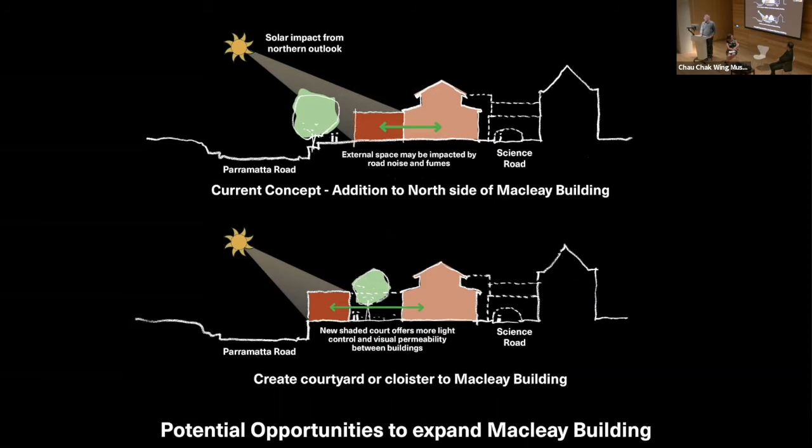So, really inspired. The other perhaps surprising thing for some people - and I hope I don't upset Scott too much with this interlude - but we were actually invited to build a building on a different site: the Macleay Museum, one of the first purpose-built museum buildings in Australia. We made some suggestions in our submission about how you might start to explore expanding a very sensitive heritage building on a very, very constrained site.

And it was a wonderful building. It doesn't exist currently like this - it's been progressively filled in, but it had the character of an amazing space, an amazing place, which could still work very well as a contemporary museum. It's surrounded by some really interesting external spaces that exist along Science Road, creating a series of outdoor rooms which we thought we could evolve.

But it has a very aggressive side on the northern edge, Parramatta Road, with thousands of cars passing there every day. So while the landscape is really interesting, the site is very, very challenging. And those huge trees present all sorts of complications for the way you might put a building there.

So to try and start a conversation about the sorts of ideas that could be explored on a site like this, or any site for that matter, we prepared a series of slides - I've taken just a few - to try and promote conversation about what could a 21st century museum be about. What should its identity be? What might it do differently between day and night? How might it express a contemporary relevance that goes beyond just the collections it has, and looks to the future?

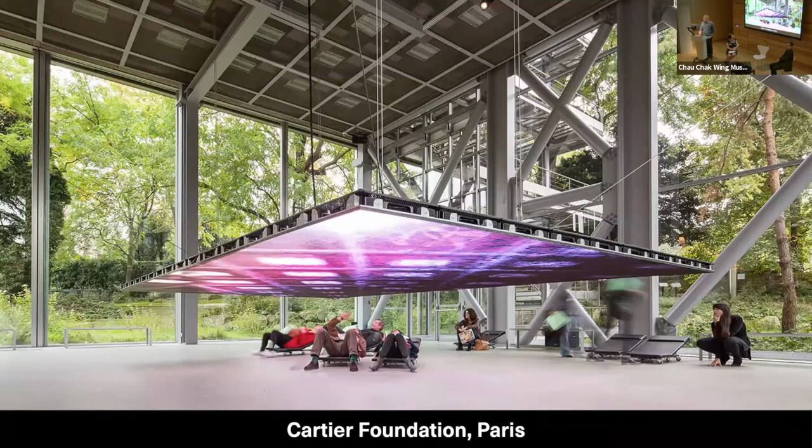How could it work at the ground level and activate spaces inside and out, and be a living place throughout the day and into the evening? How could it deal with different types of exhibitions and types of spaces that we know 21st century museums will need, yet other types of exhibitions too - and you will have seen from walking around the building already, the sorts of very intimate spaces that are quite different in their character and their ability to present material.

We talked at length about how we could capture the landscape and use that as an asset for the building, one that could do all sorts of things, that could be a programmable part of the place, just like the spaces inside. We wanted the building to be connected to landscape, like my favourite museum, the Louisiana one in Denmark - an extraordinary connection between place and purpose, which we really love.

We talked at length too about what sort of exhibition spaces should the building contain. Are they small and densely populated? Are they broad and highly flexible? What should the balance be? These are all things that a brief can't necessarily tell you at first glance. It needs to be evolved as part of a conversation. I think that's where we found so much insight from the museums team, which made it easy for us to start working up ideas.

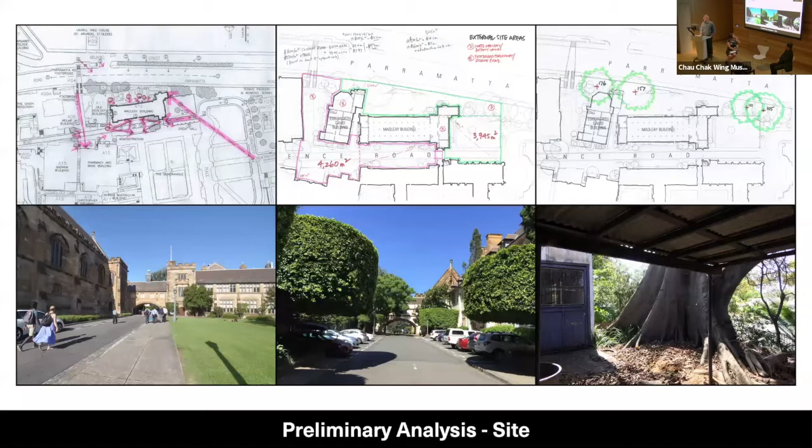So a lot of work went into understanding the place. What are the vistas? What are the spaces? How can we connect those places into the broader context of the museum? And also understanding the building — how are you going to engage with an existing building in a sensitive but contemporary way and make sense of it all in the bigger picture?

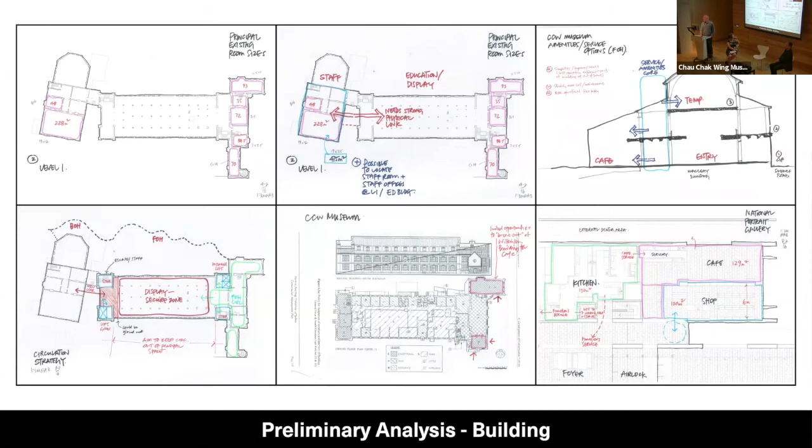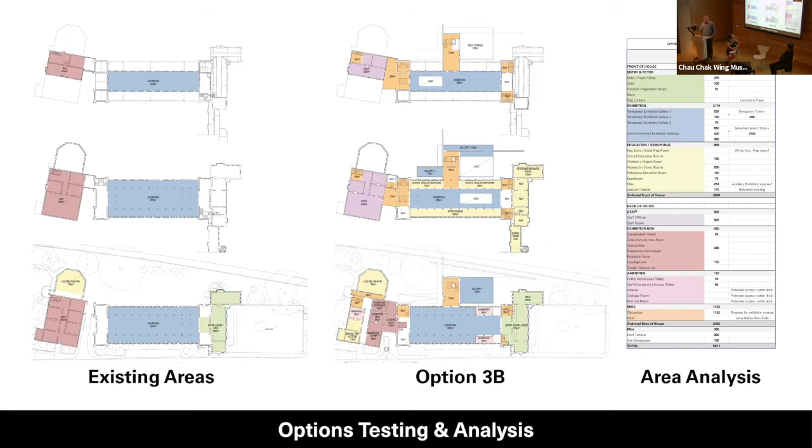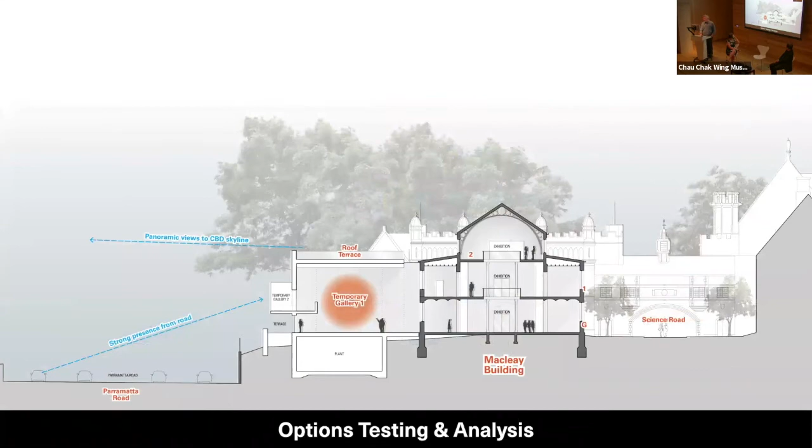A lot of work went into trying to understand area, because the museum had a very clear brief in terms of area outcome it required, since a lot of work over many years by the team had been done to develop solutions for predicted exhibition programs, which they were absolutely certain they needed. So we developed a proposal that we thought started to achieve all of those things very successfully, which had a very strong identity on Parramatta Road, but created a series of spaces internally which made the existing building flourish.

And that's where the proposition to explore a building that could exist on the tennis courts came to bear. So we had to do some work very quickly to understand what might be possible, mindful that everyone was very sensitive to this site, right at the university's front door, directly opposite the Great Hall, forming a pair of buildings as a gateway into the campus from Parramatta Road. So really, really important site.

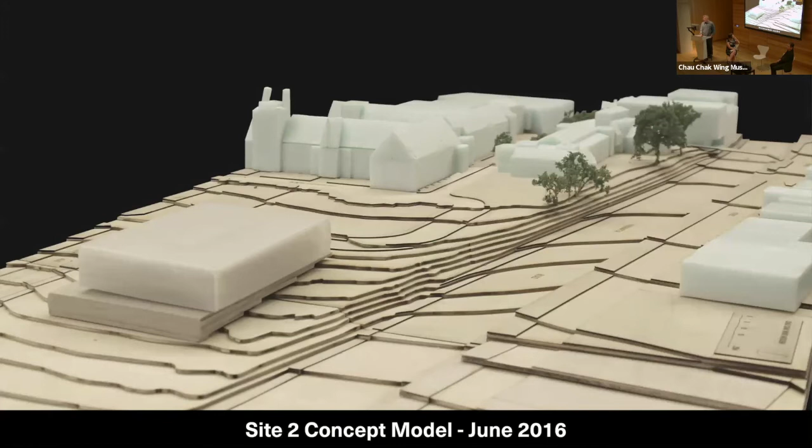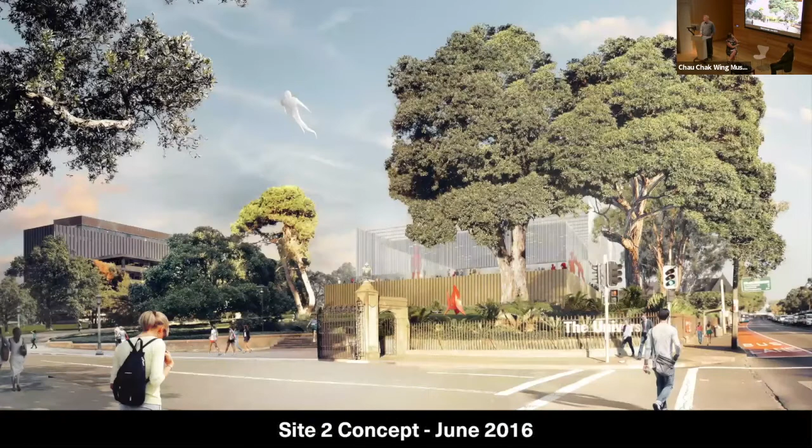Over a couple of days, this was prepared so that the Building and Estates Committee could consider the opportunity to move the site. This work became the springing point for where we got to now. So we still had this incredibly inspiring brief and interesting project, but now there were a whole lot of different pressures coming to bear on it that we needed to work through.

It was, or it is, an extraordinary site. The fact that it has such important neighbours, such a wonderful outlook to the city, and at the end of the avenue and the pedestrian way that links so many different parts of the university together, and those trees - you can't get 100-year-old trees. They are such a powerful presence on the site.

The other thing that we really liked was that it was also part of the civic infrastructure of the city and the university, which other people could share. So it did feel like a very public part of the campus, and that's something that we wanted to really accentuate. So the first thing we had to do was prove to many different stakeholders and interest groups whether it was possible and appropriate to put a building there.

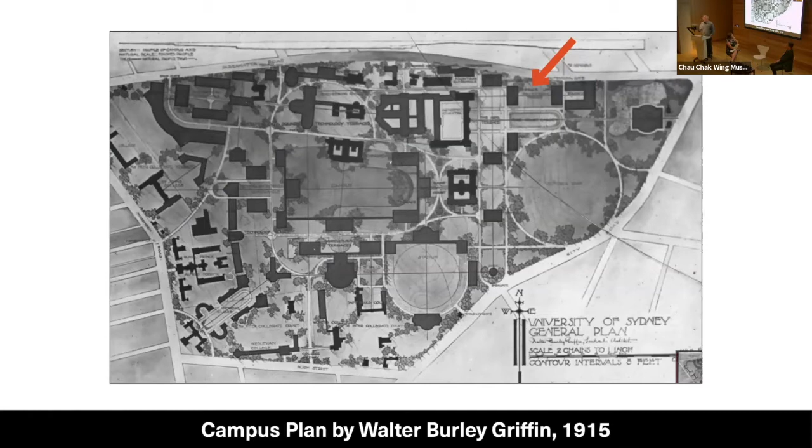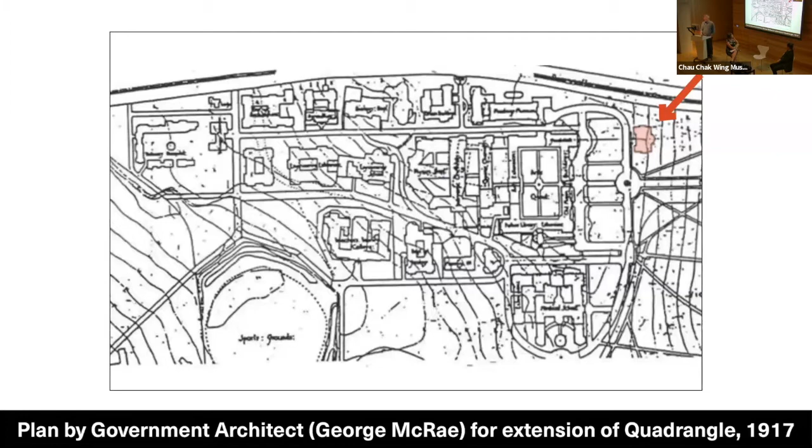So a lot of work was done to understand the evolution of the place. There were, in fact, many previous master plans, like this one by Walter Burley Griffin early last century, which proposed significant buildings on and around this site. This is partly to do with the university's land holding, which was different back then, but there were other people too. The government architect, when there was only one government architect for Australia, George McRae, had also proposed a significant building directly opposite the Great Hall.

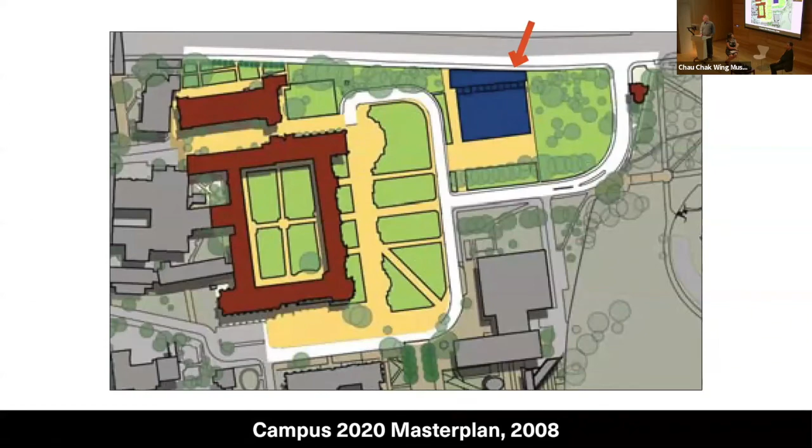You can see over time how these trees on the side of Parramatta Road become stronger and stronger. Even up to the 60s, buildings of different types were still being proposed on that site. So it certainly wasn't a sacred space in terms of building there, but it was clearly a very sensitive site. From the 60s, you can see the Fisher Library being constructed and the tennis courts existing there. Even as late as 2008, there were master plans thinking about how you could put a substantial building on that site. So there's certainly a lot of work done to sustain that argument.

It is a wonderful avenue of trees that connects Victoria Park through to the university. It's hard to argue that the tennis courts, as useful as they are for playing tennis, couldn't do more than just that. I think everyone was quite relieved that there was a precedent established by the master plans which would allow a building to be built there that could be a more generous contribution to the campus and to the city. There were clearly some alignments, sight lines, setbacks and heights that we needed to work with.

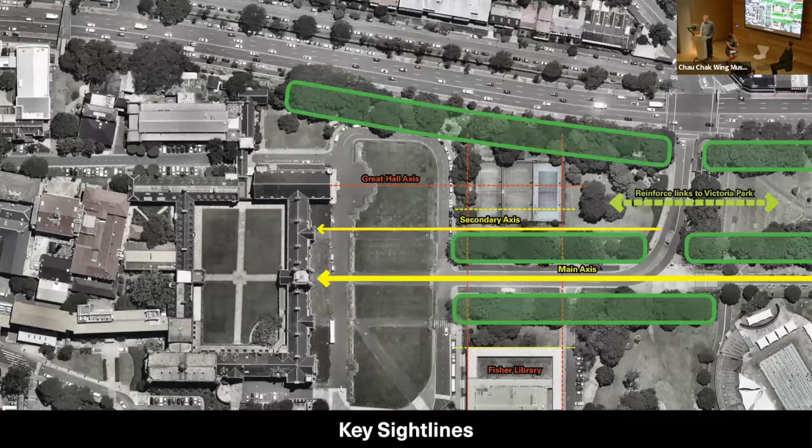In order to respect those important neighbours - and perhaps this diagram sums it up very well - the Fisher Library has a very clear volume, a very notable building by a wonderful architect. Working between those two lines of trees on the northern and southern sides creates a certain volume that we knew we could work with.

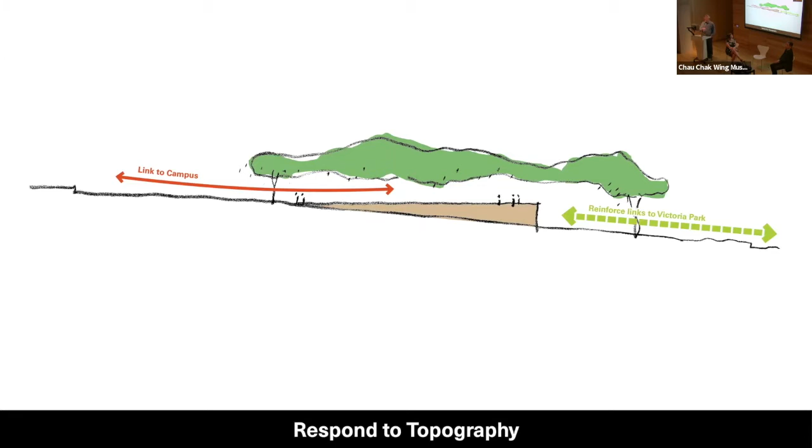We wanted to find a way of creating more useful space for people, like the tennis courts, but not as a tennis court, that was very well connected to the campus and would invite people in, and also connected through to Victoria Park, because that's such a wonderful outlook and connection through the landscape. So how could you organise all the spaces the museum needed onto a very constrained footprint?

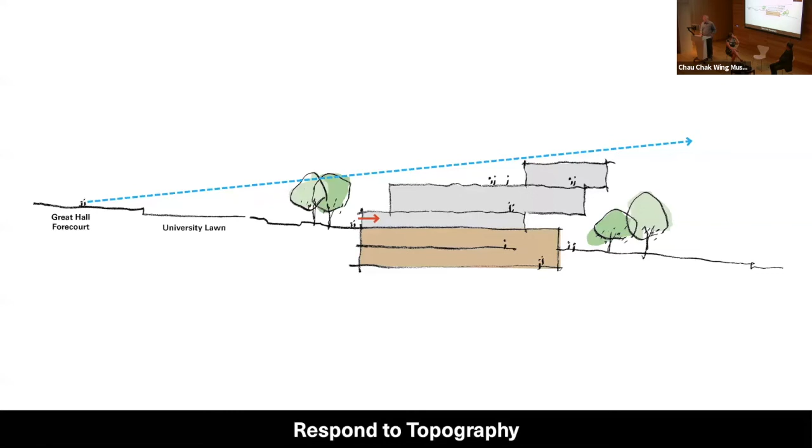A lot of work was done trying to understand how you could join different parts of the brief together to be very efficient, and how you might start to stack those across the site to work. Lots of studies were done, and this is a pretty warts-and-all summary of the process we were following. Lots of people were exploring different ideas at the same time, and we would regularly meet to try and explore which were more successful than the others.

A lot of models were made, again, to try and understand how some of the very large volumes, like the temporary exhibition space, could be organised in a way that made sense of a building form, but also a circulation system inside it that would work. So how, over many levels, dealing with the topography, which is quite steep, could you organise those levels so that it felt comfortable?

The last thing we wanted to do was create a museum or public building that felt like the moment you walked in the front door, most of what you were going to do was either disappear deep into a hole in the ground or have to walk up heaps of stairs to get somewhere. So finding that balance was quite critical.

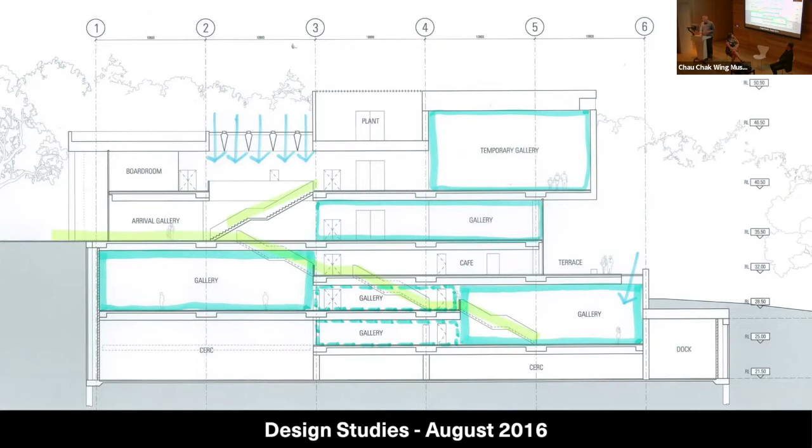A lot of work went into understanding that sequence of spaces which would help meter out the arrival experience and your understanding of how the building is organised. A lot of modelling was continued, but we were starting to reach a point where we thought this approach was not terribly successful. It was a little bit too complicated.

So we took a step back and reviewed the brief again and tried to take a different tack. Just for everyone's interest, this is a summary of the brief, and it is fairly similar to many other briefs for this type of building, where you might expect about a third of the building space to be exhibition space.

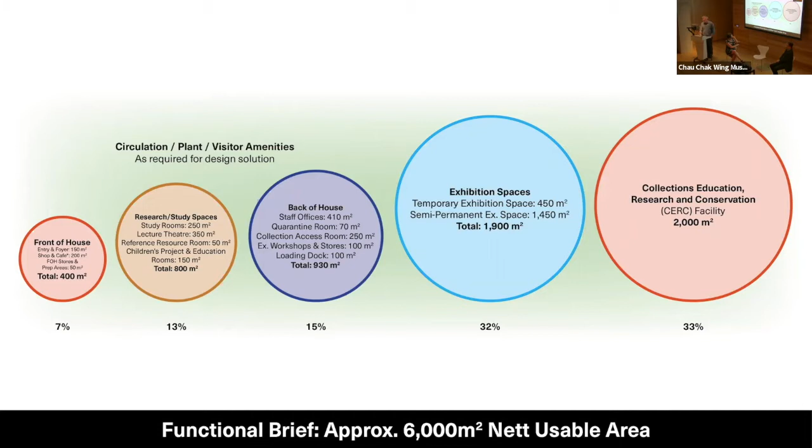This has relatively low back-of-house space, but it has other facilities around the campus. And then there are a series of programs that hang off those things. And then there's this notional idea that circulation, plant and amenities somehow get organised within this broader picture. So a lot of it was designed by spreadsheet to satisfy a range of stakeholders who clearly had to tick off those things they needed.

But normally this would be a dreadful thing to say and quite disparaging, but it was good in the sense that it focused everyone's attention on what was important. And it made people think about how you could create spaces that had multiple purposes. So could a circulation space be at one time a usable space for an exhibition or an event or a dinner? It really made people on all sides of the table negotiate to find the best outcome we could get.

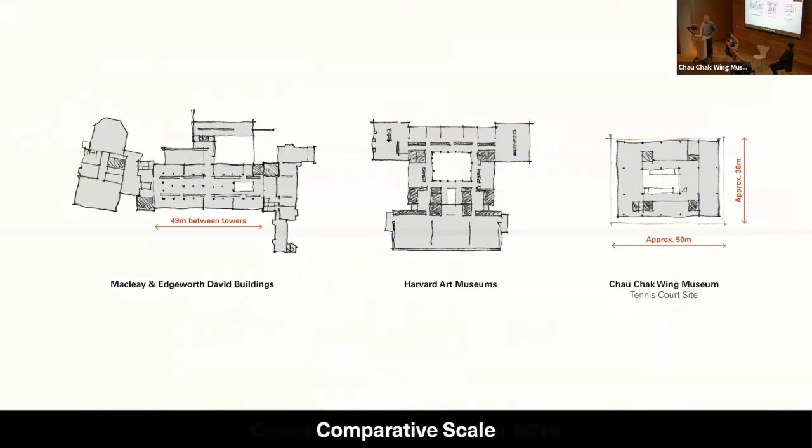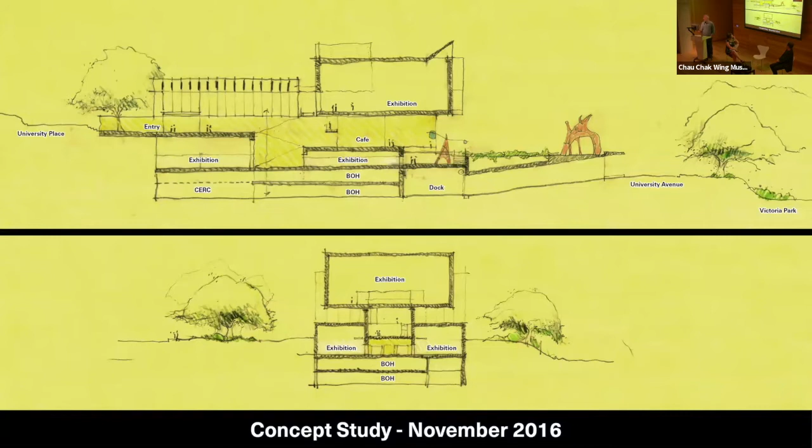A lot of studies were done to try and understand how we could integrate the building into the landscape and create a sequence of spaces which made sense both from inside and outside as you navigated around. Having gone through that very circuitous loop, we arrived back close to where we'd started, but with a very different solution: a ground plane that was habitable with a series of spaces which stepped down across the topography, and a series of spaces contained in a volume that floated above that to create openness and a sense of access across the ground plane.

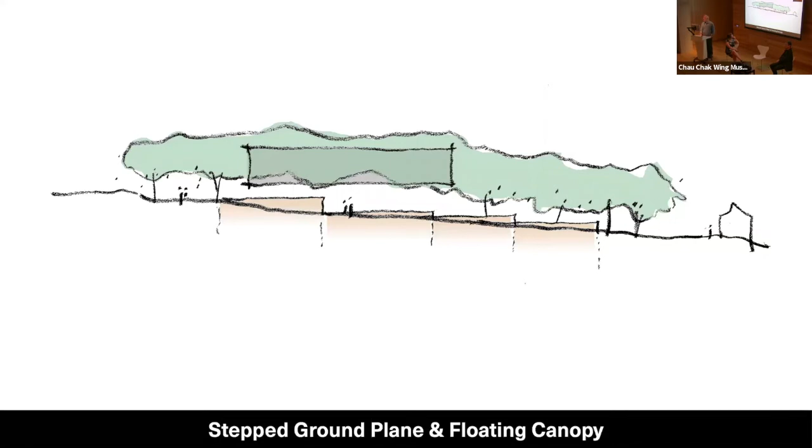So that was the model. It's incredibly crude, and looking at it now, I'm surprised we got it over the line.

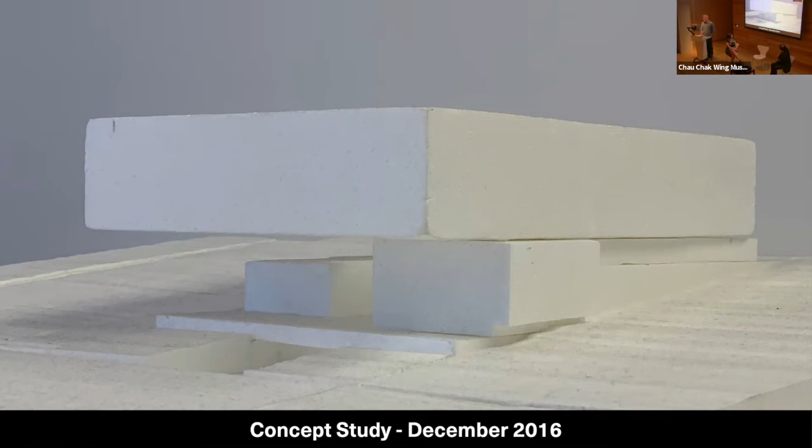But everyone, perhaps they were just shocked, but it worked. We were able to explain how the thing worked. And so this was the start of the building in the sense that there is an arrival experience that relates to the Great Hall, but really gives you a sense of compression before it opens up to those fantastic vistas to the east.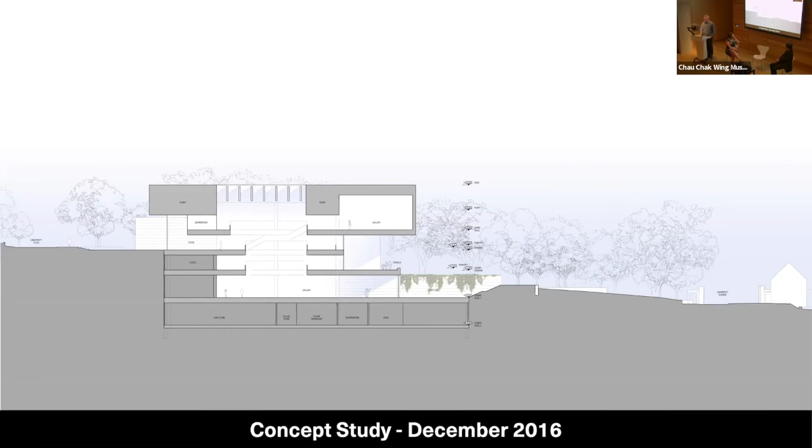A multi-level building with a very clear circulation system that is centralised and has a daylit skylight on top of it, and a series of spaces then that connect out to the landscape around it.

So this is a very early drawing from quite a few years ago, which still captures the essence of what we were trying to do, that sense of walking in from the foyer space where you deal with all those conditioning things, cloaking and the like, and you step and you see all of a sudden down to the landscape right from that entrance experience. That's a great thing, because all of a sudden you've got everything presented in front of you that helps you understand how you can then go and explore this building.

One of the challenges of designing a building with so many accessible public levels is that you don't want to end up with a dead end at the end of that experience. So having a central circulation system with a series of galleries looped around it meant that you could create an experience where people could enjoy it on the way in and on the way out, which was very important.

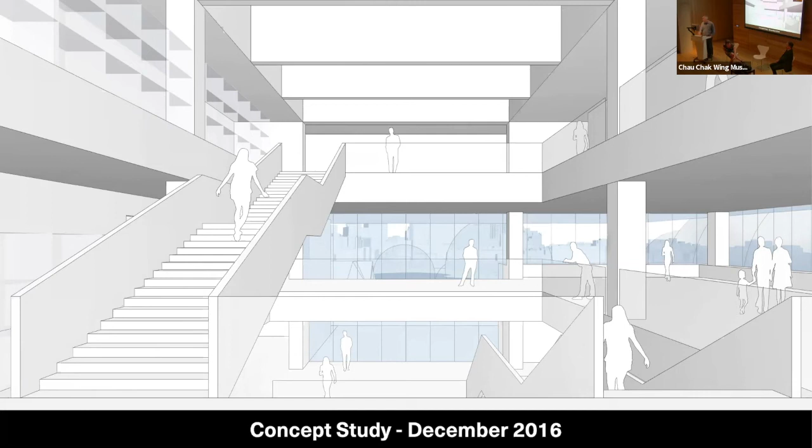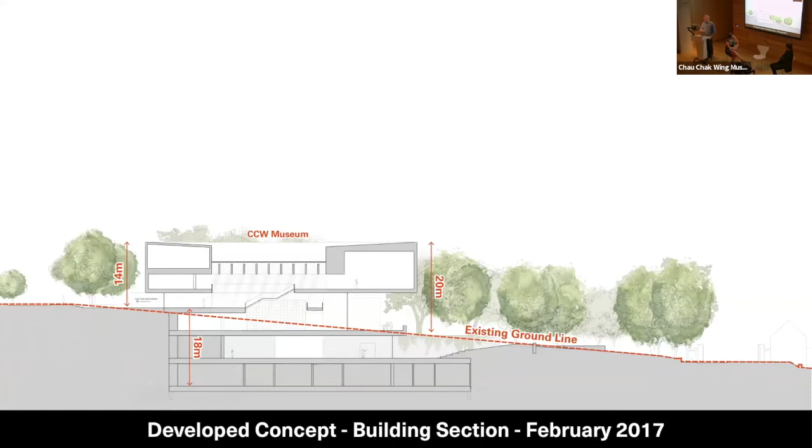The height was defined by the Fisher Library. We didn't want to project up any higher than that, so it meant more of the building had to be suppressed into the ground. That creates challenges for how you get trucks and the like into the basement and the loading dock, but we were able to solve those.

So this was the drawing that went in for the planning submission, and it's very, very close to what you see today, largely because a lot of the work that was done to simplify and rationalise everything stood the test of time through the development.

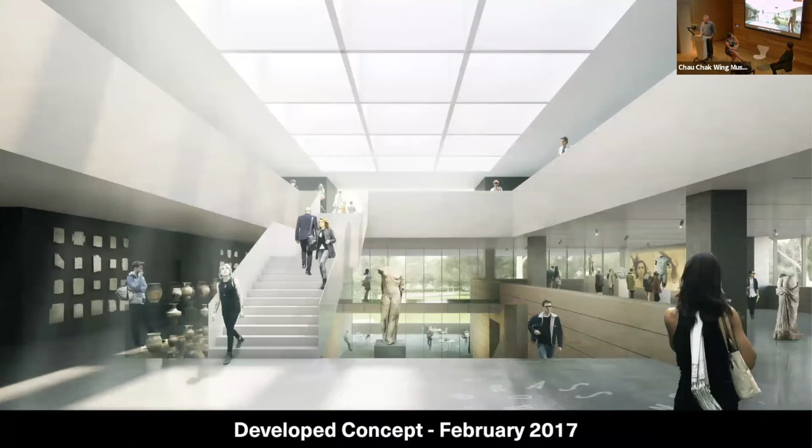It's a bit of a gloomy image we never quite liked, but this again captured what we had really hoped to achieve right from the start.

That was really the end of 2017, and all throughout 2018 we were documenting the project and working with a series of user groups. I think this is user group number 12. There was a very detailed series of consultations with each of the individual user groups to eke out those details of the brief which will make the building work for now and into the future.

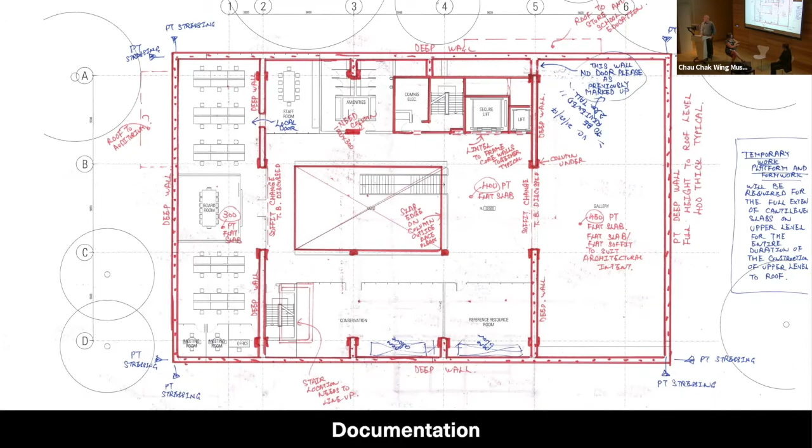So an enormous amount of effort, which is only visible through the way people are now using the spaces, was evident, and an enormous amount of structural work to get the building to stand up. But it turned out that this was the most efficient way to achieve the objective we set out to deal with.

One of the things we always get asked is, how on earth do you create buildings like this that look so simple and effortless? The short answer is an enormous amount of work and a bit of yelling at people. And it takes a long time.

And it's not just the design that does this, it's so many other people that are involved - engineers, designers, builders, subcontractors. All these people make an enormous contribution, and we get to stand up as architects at the end and say, look how great we are. This building was an enormous effort from so many different people.

What I thought I could do, because we get asked that question, is run through very quickly how this building was assembled, because I think it might take some of you by surprise.

So in January 2018, it was a vacant site. Very quickly, a hoarding went up. There was a bit of disquiet about where the tennis courts had gone, but it kept going. By the middle of that year, there was a groundbreaking ceremony and the builder was on site.

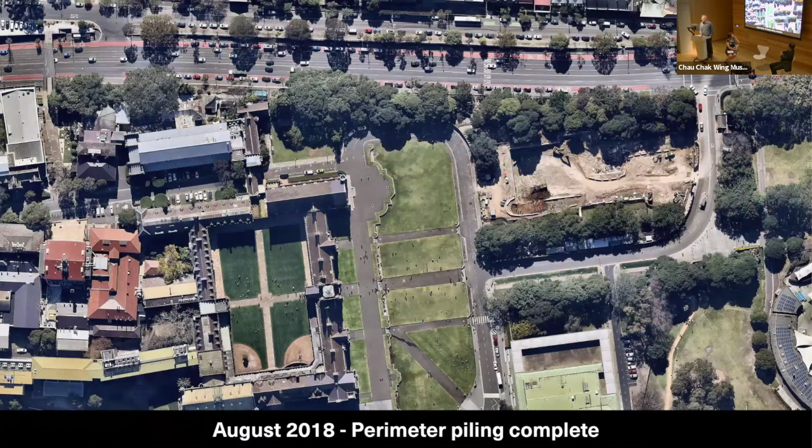The piling had been completed and the excavation had started. There was an awful lot of dirt to dig out, and that kept going for several months. You can get a sense from this image just how deep that basement was needing to go in order to contain all the spaces required to be below ground level.

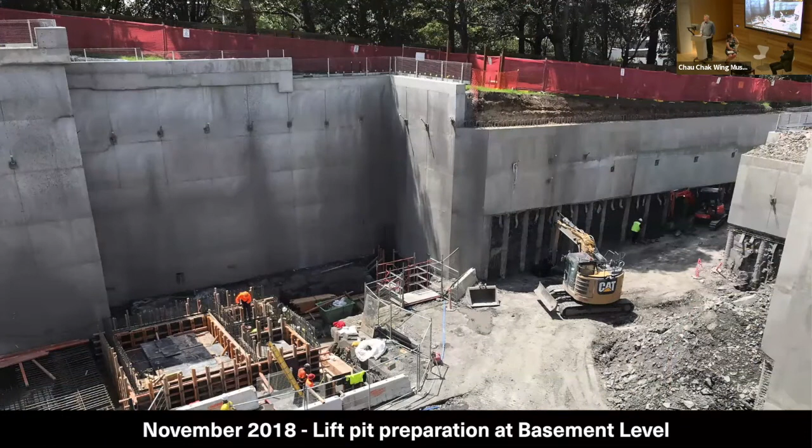By November, most of that excavation was complete. Again, you can see with the guy in the high-vis orange vest just how big those perimeter walls are, in order to create that space. Ramp coming down on the right-hand side, and the lift pits just being constructed.

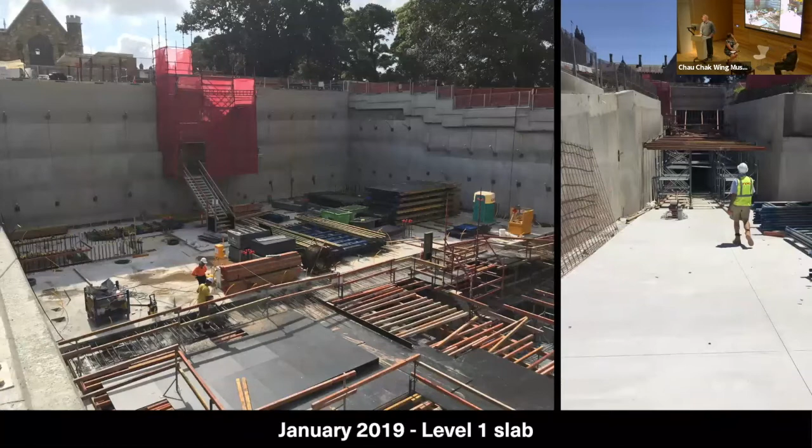But very quickly after that, the main structure started to move up. By December and January, we're starting to get the first levels of the building inside. The ramp was being constructed. By February, the first precast panels were arriving on site and almost immediately covered by the builder.

I must say that FDC, the builder engaged by the university, were excellent in the way they treated both the site and the building as something that would, in a sense, become part of the university's collection of artefacts. They were very respectful of the work and made sure it was protected.

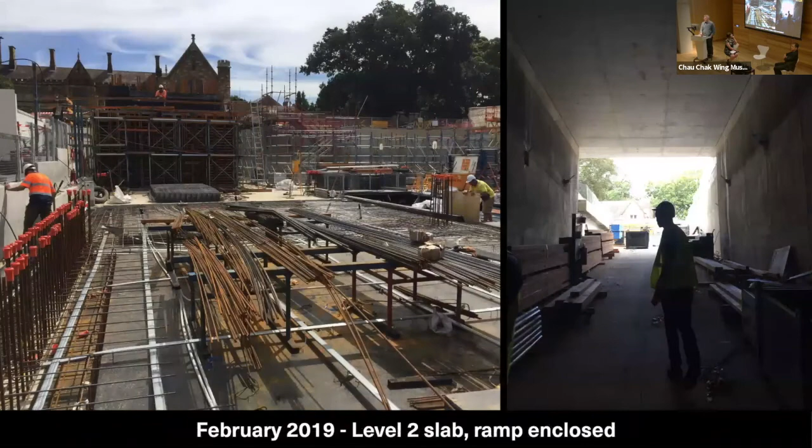Slabs coming up very, very quickly, ramp starts being closed. By March, we're getting up to ground level. So by March, we had a ground floor slab and you get a sense of the space.

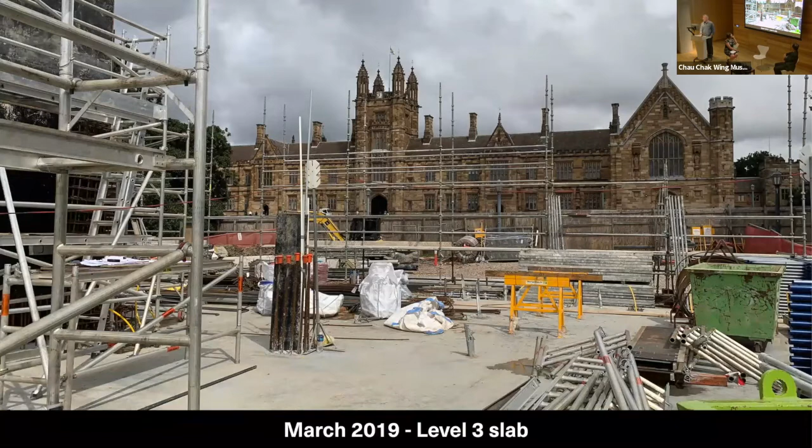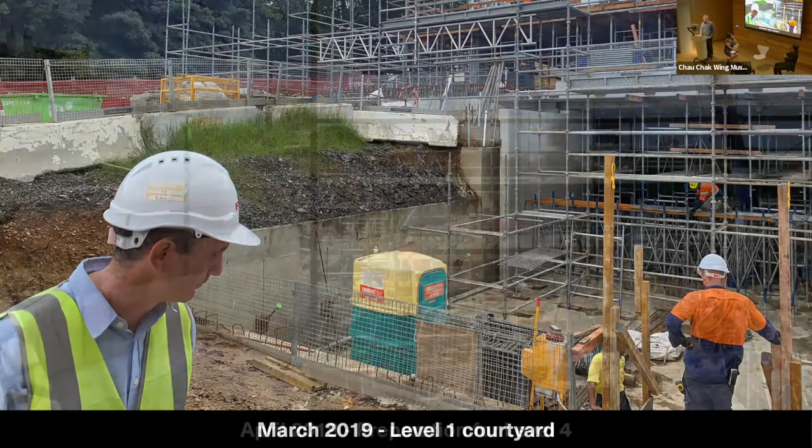All the museum's people were keen to visit, and David in particular and Paul were always on site having a look around. You can get a sense of the courtyard now coming together on the eastern side. More precast, which is part of a family of elements we might talk about a little bit later.

By the middle of that year, we're starting to get the concrete box coming up. Very large volumes, Marguerite giving the builder a bit of grief. An enormous amount of coordination to create this sort of environment was required - a lot of thinking through with the builder, a lot of prefabrication, a lot of prototyping.

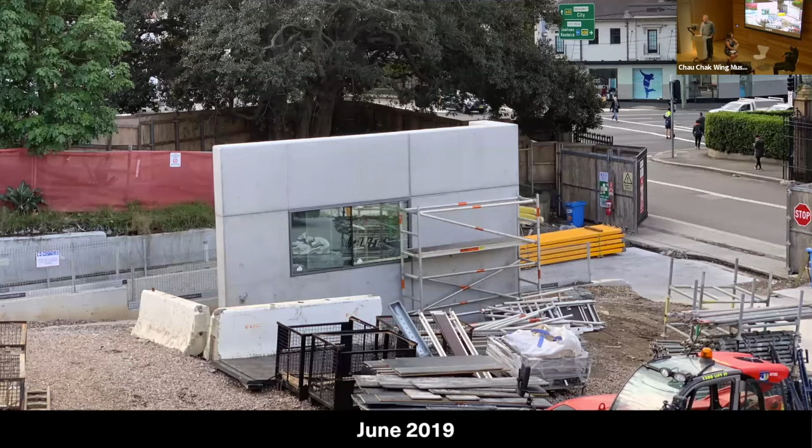Again, credit to the university for pursuing this. We would always suggest it, but everyone was prepared to take the time and spend the money to do it, so that we all learned through that process.

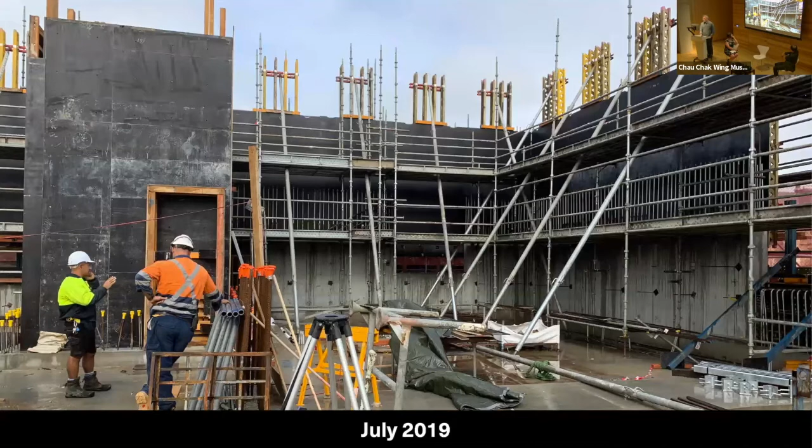The concrete box was completed in 3 pours. So while all that was curing, effectively, there's an awful lot of propping to keep it up there. So this is actually the lobby space at the front.

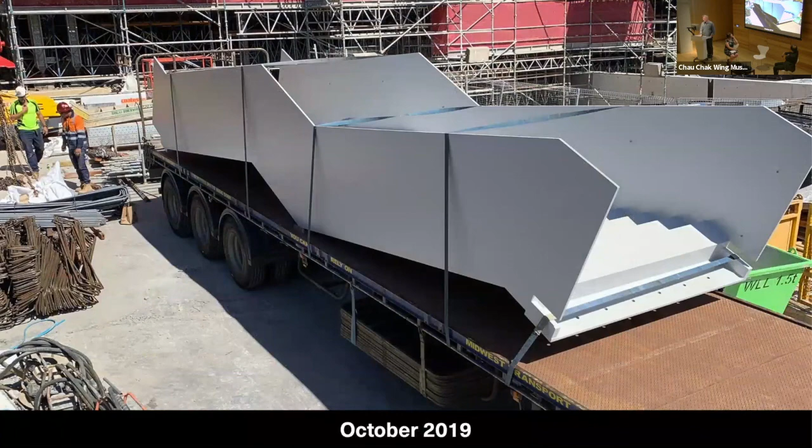Very soon the building was closed up. Stairs and stuff are starting to arrive. So a lot of work went into framing up how the building hits the ground.

So this is inside. This beam that runs along the side is how we engage the precast as it comes down to the ground, so that it looks natural against the landscape that comes up to it.

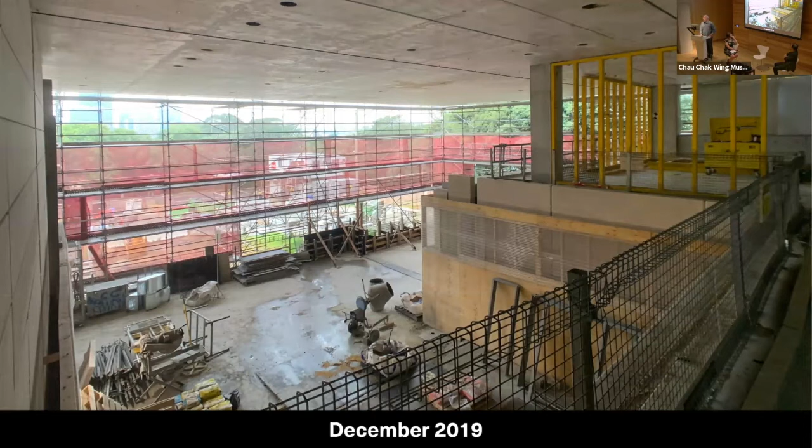This was also a disaster because you might all remember that was a period of extremely heavy rain, and that set the builder back quite some time. So that was really unfortunate. But once all that was depropped, I think everyone suddenly realised the sorts of potential this space had into the future. So it was great.

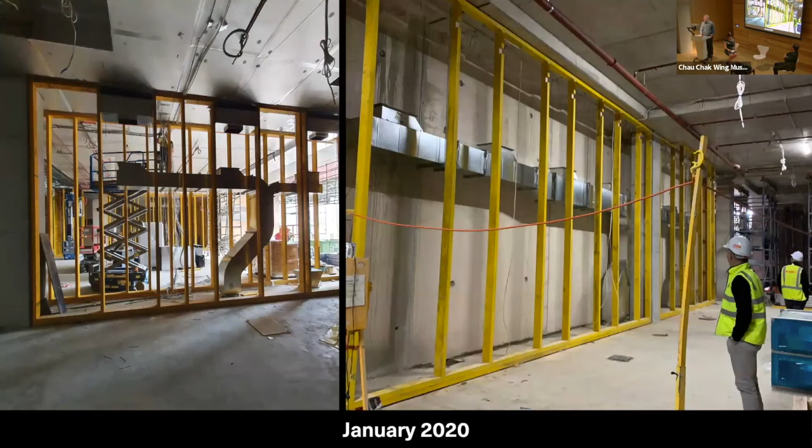By the end of last year, the skylight was starting to be framed up, and I included this just to give you a sense of how hard parts of the building are working. Because the height was compressed and because we couldn't put risers everywhere due to so much pressure on area, the walls are doing the distribution of services to try and take the pressure off usable spaces.

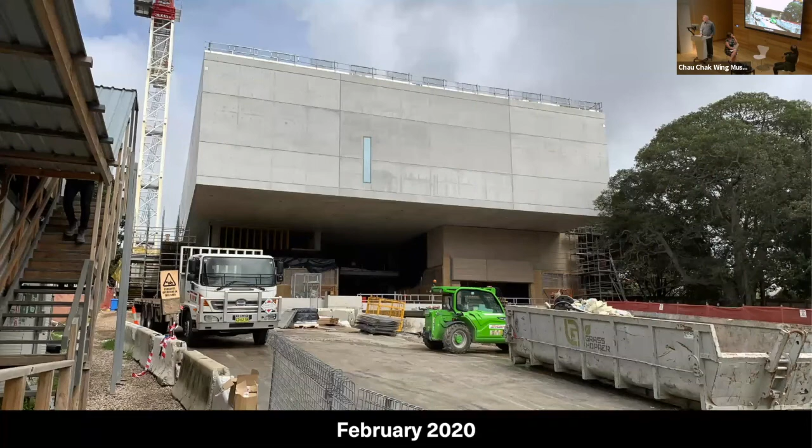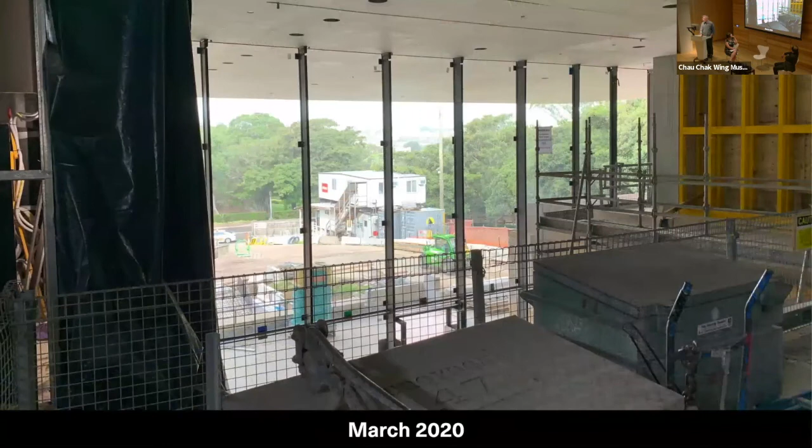By February this year, the building outside was more or less complete. There was a lot of work going on inside, more spaces being created, the skylight coming up, landscape starting to be developed, building starting to be enclosed now, which meant more work could be developed. This room we're in now, again, starting to be framed up and created.

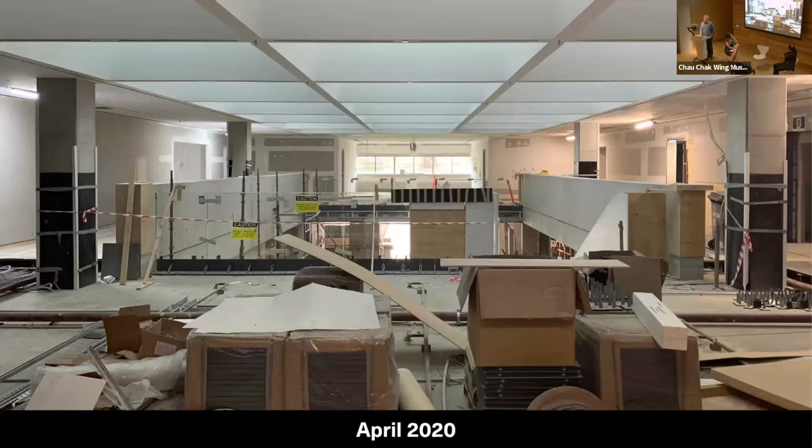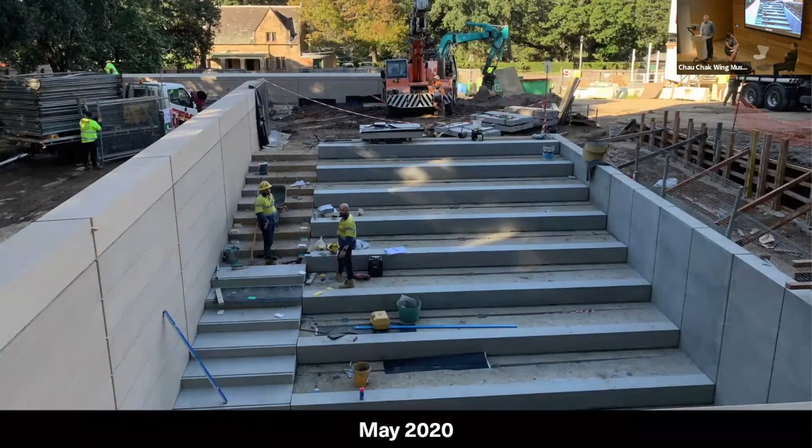By April, the roof was finished, everything was enclosed, but still a lot of work going on inside - fit out of different types all throughout the building. Again, trying to manage multiple work faces by the builder was handled very, very well, I think. External spaces being created, while some were being finished, others are still really, really busy all through to the middle of the year.

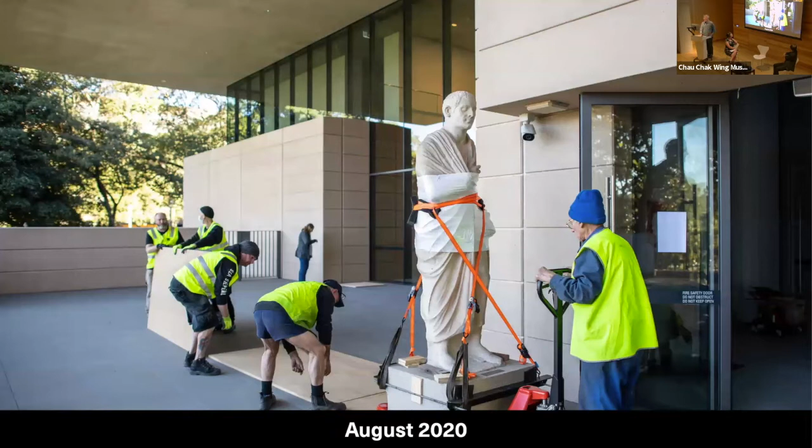By August, the building was effectively practically complete, which meant the fit out could start. So that's where we got to. For us though, I think it is the start of - and I purposely haven't included any images of the finished building because we don't have any yet that have the collections or the displays in them.

We do need to mention Dr. Chau because his benefaction was a significant part in making this project happen. But I think it's more his aspiration for the potential of a place like this to create a safe space for all sorts of crazy ideas and interesting artifacts and thinking about culture can intersect. And what a better place to do it than at the front door of the university. I think it's absolutely marvellous.

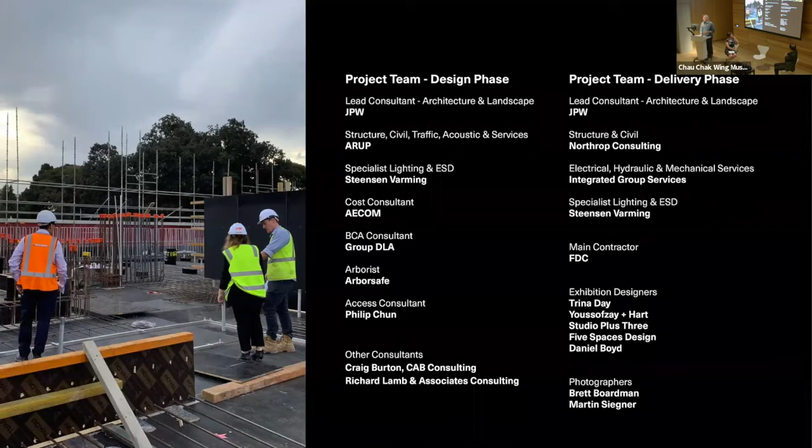At the risk of running on a tiny bit, this is high risk, but we need to thank a lot of people. Every part of the university that we were involved with worked very, very hard, and I think all these groups were incredibly important. I would like to single out Scott Biggs for his contribution because it was very, very important. We had a big team. This project was broken up into two parts - there was a design component, then when the builder was selected, we were novated across. So some of those changed, but everyone joined in with the spirit of the project, and I think it's a credit to everyone, whether all the way through or just part of the project, they really made a big difference.

Thanks so much for giving us such a presentation and actually so much insight into the process, right down to the nitty-gritty and the details, and some of the models you made along the way and some of the difficult decisions you made along the way.

I guess probably the first and one of the most burning questions for me is - it's not that often that you get the opportunity to design a new museum building in this day and age. So what is it like to design and plan a museum for the 21st century?